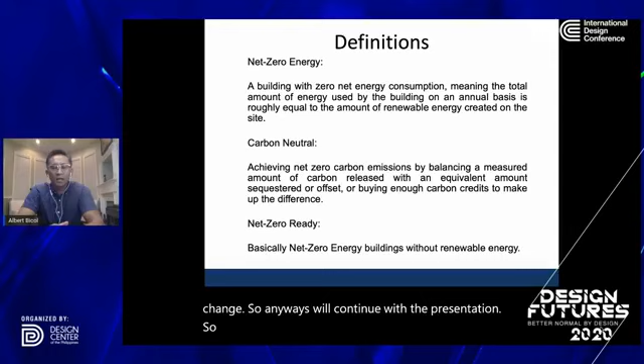So just basic definitions: net zero energy. All the energy that you consume in your building, you need to offset that energy with renewable energy. It's that simple. There's another definition of what we call carbon neutral. Carbon neutral buildings are similar to net zero buildings, but you only offset the carbon footprint of the energy that you're using.

For example, in Vancouver, we have hydropower electricity, and we only need to offset 5% of the electricity that we consume, because that's the carbon footprint of our power. And of course, this is different all over the world.

There's another definition that we use here in Canada and North America, which is what we call net zero ready. That means we do all the work to design a net zero building, and then the last part is to apply renewable energy in the future. That means it's ready to be net zero. So those are your basic definitions.

Now, this is fact. Global temperatures are rising, and what I can do, and the people out there in the building and built environment industry, and our colleagues, architects and engineers, we need to work together to reduce these global temperatures. And it's a proven fact that once we hit a 2-degree temperature rise of our planet, that is a very dangerous time.

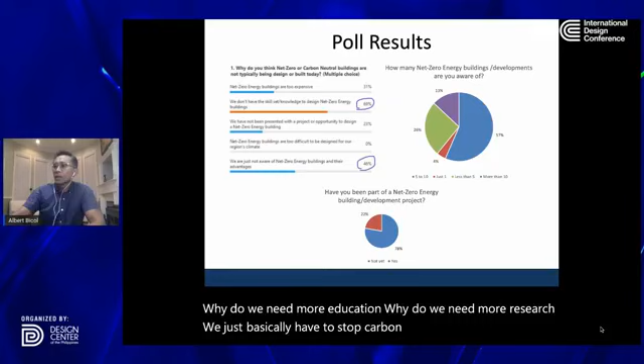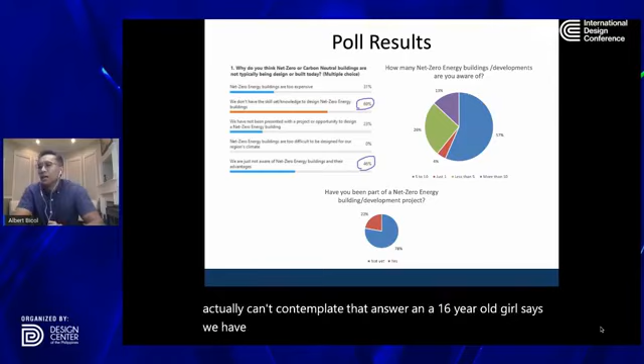I did a presentation for a Singapore group for smart cities, and I just want to share some of the results with you. Why do you think net zero and carbon neutral buildings are not typically designed or built today? One of the major poll answers is we don't have the skills and knowledge. Well, you know what? We do have the skills and knowledge. I actually can't contemplate that answer. And a 16-year-old girl says we have the knowledge already. And then the other poll result is we're just not aware of net zero buildings and their advantages.

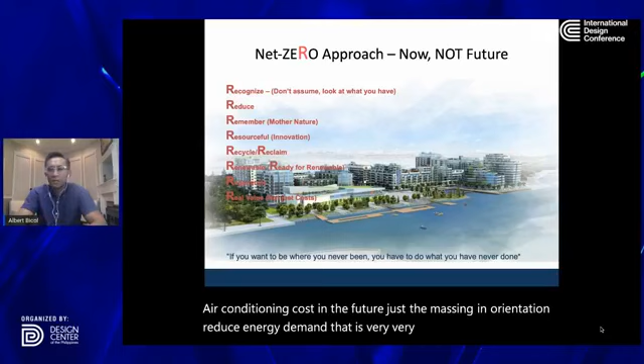Massing of the building can save you on energy and air conditioning cost in the future. Just the massing and orientation. Reduce energy demand. That is very, very important. You're looking at passive design. You're looking at all this stuff, and we'll go through this in greater detail. Remember the laws of physics and Mother Nature. Hot air rises, things like that. You know, natural ventilation, being resourceful.

What we mean by that is in Canada, and some of these concepts, I'm just generalizing. Of course, you have a floor slab that holds the floors up and the building. This floor is actually a thermal mass that keeps the building cool. So it serves two purposes. Anyways, we'll go through some of those concepts later. Recycle and reclaim. So any energy that you use, you have to think about it and you have to recycle it. There's ways of doing all that.

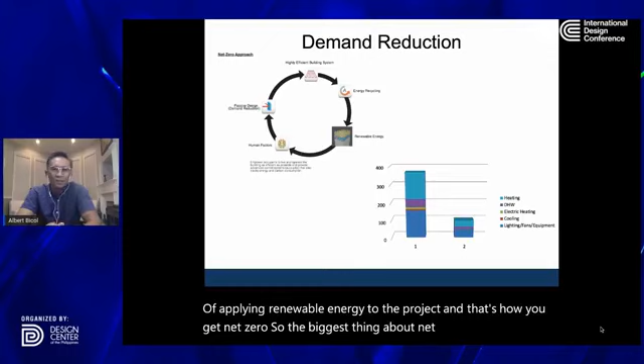And then the last part is you apply renewable energy, and then you decide what is the most feasible and low cost way of applying renewable energy to the project, and that's how you get net zero. So the biggest thing about net zero buildings is not the technology. It's not the solar panels or the wind turbines. The hardest part and the most innovative, and I guess the most cooperative thing that we need to work with in terms of the design team, engineers and architects, is how to reduce the energy demand of the building.

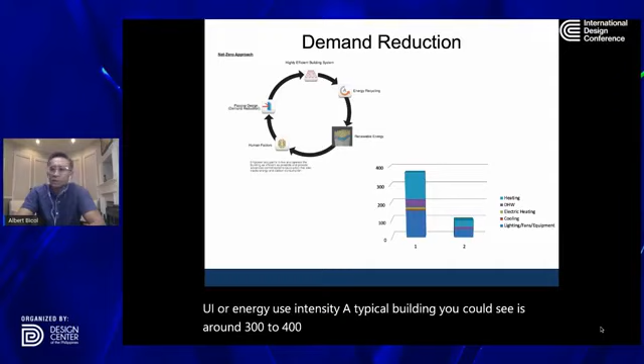And this is mainly measured by EUI, or energy use intensity. A typical building you could see is around 300 to 400 kilowatt hours per square meter per year. Most net zero buildings that I've designed are at 100 or below. And this is 80, 90% of the effort.

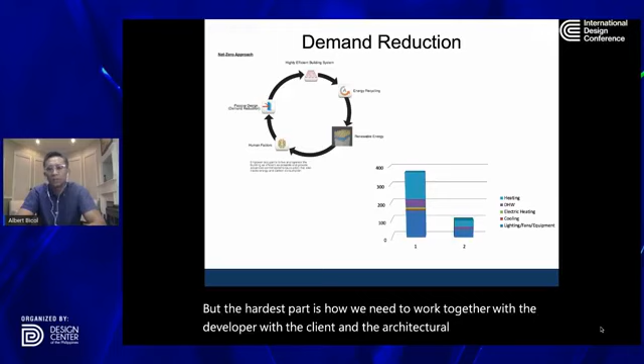You know, there's not much in designing renewable energy systems. It's solar panels on the roof or things like that. That's just a checkbox or a technology thing that you apply. But the hardest part is how we need to work together with the developer, with the client, and the architectural team, and all the rest of the design team, to get the demand low.

I am a big advocate of passive design. I'm a mechanical engineer. I'm an engineer. The last thing I think about is air conditioning and heating. That's the last thing. For example, for electrical engineers out there, the first thing I think about is how to maximize daylighting in this building. And then I look at LED and all these technologies.

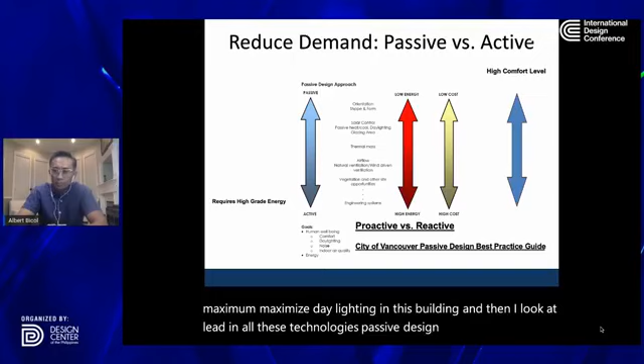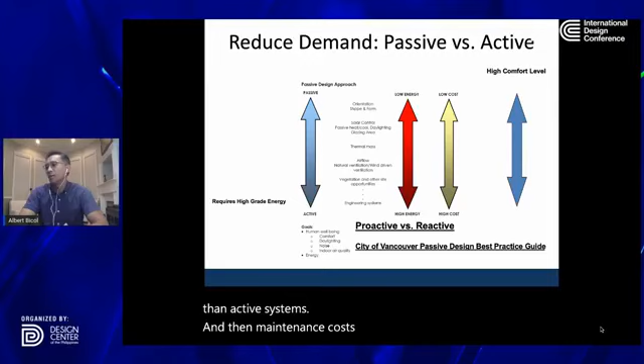Passive design in the scale, we've proven this. As the building becomes more passive, the building becomes lower energy consumption naturally. And the cost of the building reduces. Passive systems are lower in cost than active systems. And then maintenance costs, operational costs, everything goes down. And then if a building performs passively, it's more comfortable. Okay, that means you use less air conditioning. So it all sums up. It's all basic stuff.

So here are some of the common features of net zero or carbon neutral buildings. Integrated design, everybody understands that. We don't need to go into that too much. And here we go again, passive design first, not technology first. Natural ventilation I've seen on most of my projects. It's very applicable, even in the hot and humid climates of the Philippines. I'll take questions on natural ventilation, on how comfortable it could be in a hot and humid climate, if there are a lot of questions and debate later.

Thermal mass, radiant systems, that's common in other climates of the world. And then, of course, we look at local sinks. That means we look at things like underground aquifer wells that we can pump out through the ground, and we can use that for cooling. These are natural systems that occur. Can we use the seawater to cool our buildings? And then, of course, common for these buildings is on-site energy generation. That's solar panels and wind turbines.

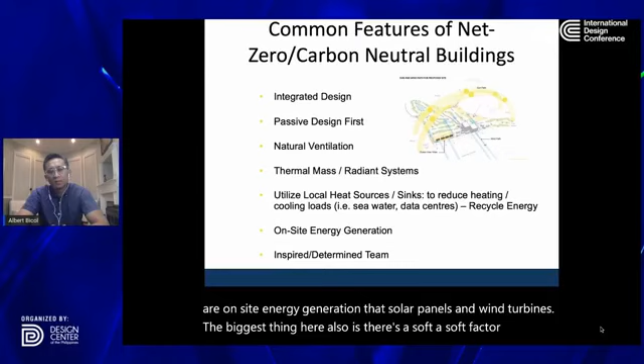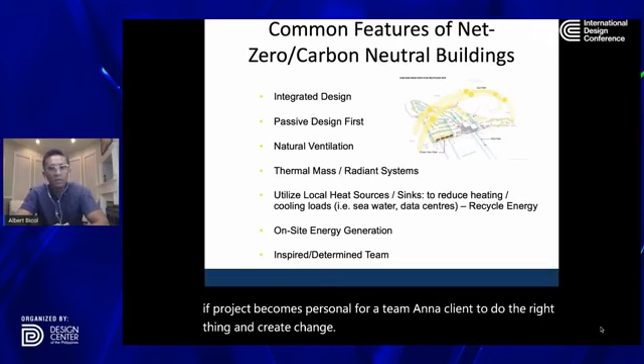The biggest thing here also is there's a soft factor. What I'm saying is that there has to be an inspired team. Somehow the project needs to hit a personal string. Someone in the client team is a champion and they want a net zero building or else. This is a personal thing. And the reason why I mention this is most decisions are based on a personal level. It's not a technical level. It's proven fact. Most people make decisions if it's personal. And if a project becomes personal for a team and a client to do the right thing and create change, you'll get a net zero building one way or the other.

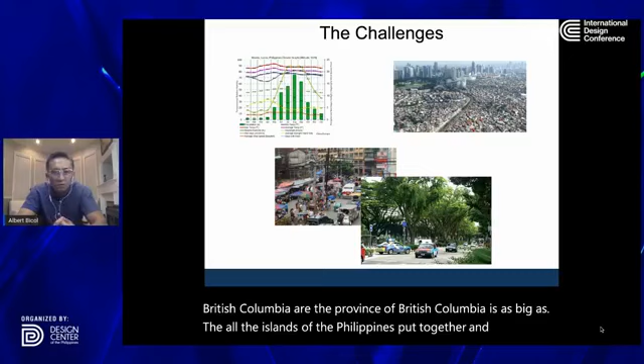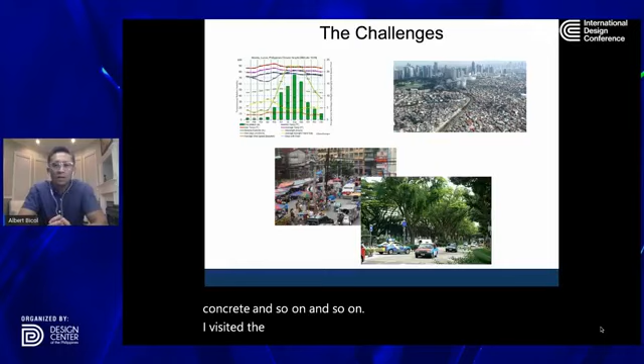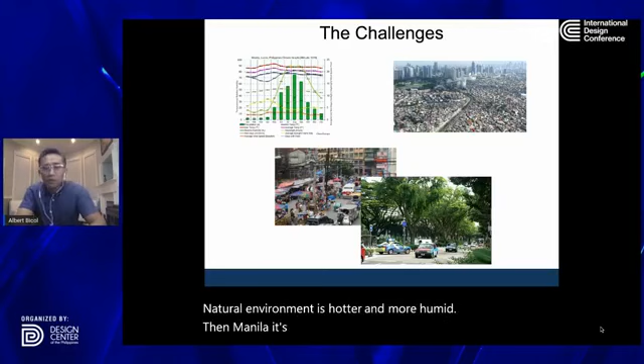I visited Makati a lot. I've been in Metro Manila, and I've also compared and visited Singapore. If you look at how we deal with this concrete, Singapore has a lot of shade. Singapore is actually closer to the equator, and for people who have been to Manila and Singapore, it seems cooler, even though their natural environment is hotter and more humid than Manila. It's just Manila artificially becomes hotter. So that's some of the challenges.

So this is coming back to the Singapore scenario, how to deal with the heat island effect. I don't know if this is true, but you come from the airport. I've always chatted about this with my wife, but there's a lot of trees on the highway, and it shades the highway. If you come from Changi Airport, these trees I heard came from the Philippines, and so it's kind of weird how Singapore uses these trees to reduce their heat island effect, and we should be using more in the Philippines climate.

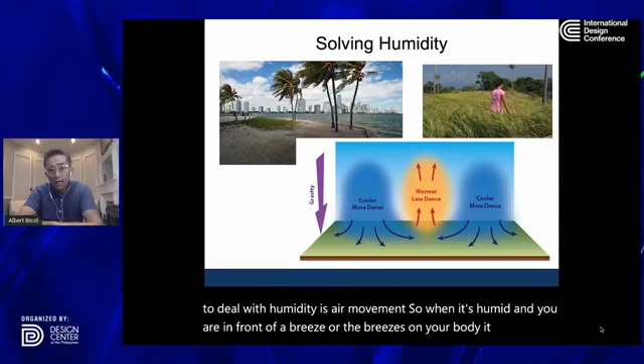Solving radiant, so that's solar gain, and that's the biggest thing for air conditioning that we have to look at, and I'll go through a few examples. Humidity is a big challenge. So the easiest way to deal with humidity is air movement. So when it's humid and the breeze is on your body, it cools you off. It dries the sweat off you. And that is how you solve the humidity issue.

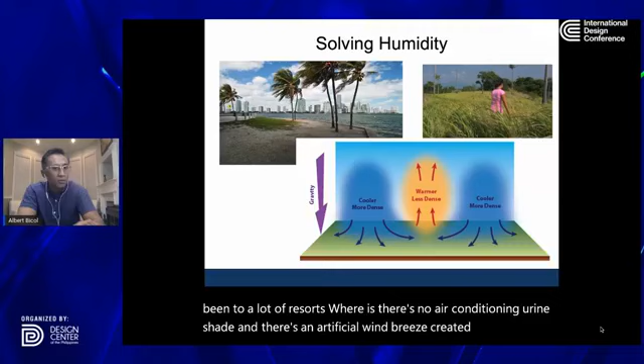So if you're under shade and it's windy, even though in the climate of the Philippines it's 40 degrees out and it's 80% relative humidity, you could feel comfortable. And I've been to a lot of resorts where there's no air conditioning, you're in shade, and there's an artificial wind breeze created by the architecture. That solves everything, and it's not air conditioned, and it's a high-end resort.

So there you have it. So you could just shade yourself and be in the breeze, and you could be cool. And that is one of the Bahay Kubo scenarios. As you could see, the Bahay Kubo is what we call environmental responsive design. Before air conditioning, before technology, this is how the Filipinos kept cool.

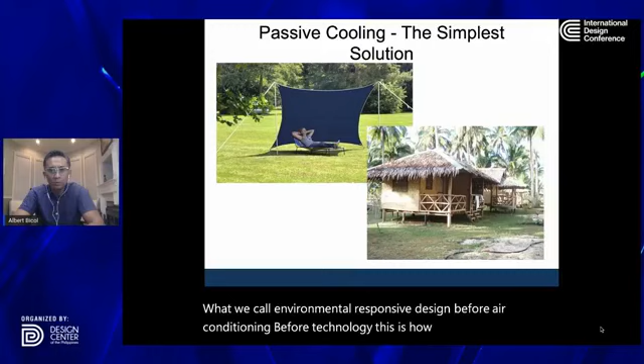So if we generalize it, in hot and humid climate or tropical climate, this is the architectural design, how to deal with the climate. So it's heavily shaded with the roof. And then if you open the window, it actually pops up, and then there's added shade, and then you get the natural ventilation. It's raised up so that the bottom of the Bahay Kubo gets cool air, and then hot air rises, escapes through the top of the roof, and you get good stack effect and natural ventilation.

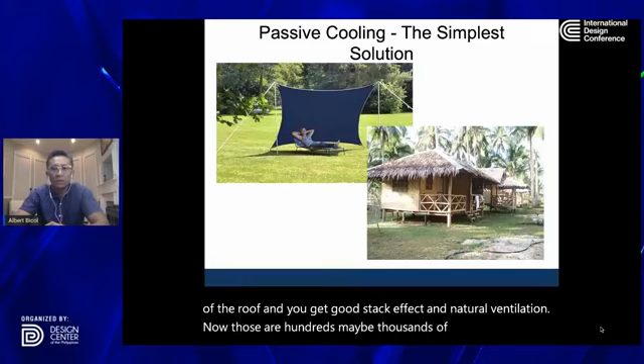Now, those are hundreds, maybe thousands of years old technology, and we need to modernize it and use these concepts in our buildings, and they can be used. Here's the perfect example. If you look at how you design churches. I'm sure the Philippine people would be familiar with this.

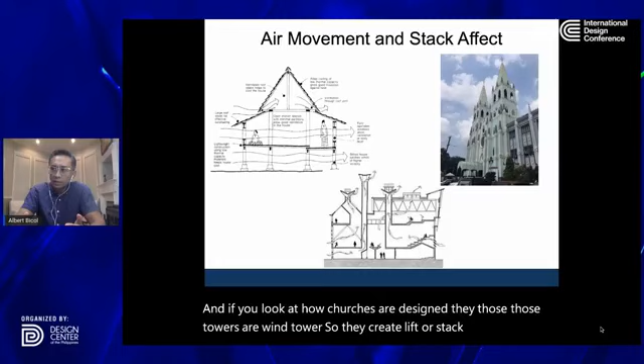This is San Sebastian Basilica, and if you look at how churches are designed, those towers are wind towers, so they create lift or stack effect, and what that does is all the air comes through the bottom, which is cool, and then all the hot air escapes through the top. And the more stack effect you have, the more air movement. That means it helps with humidity when you could feel an artificial designed breeze.

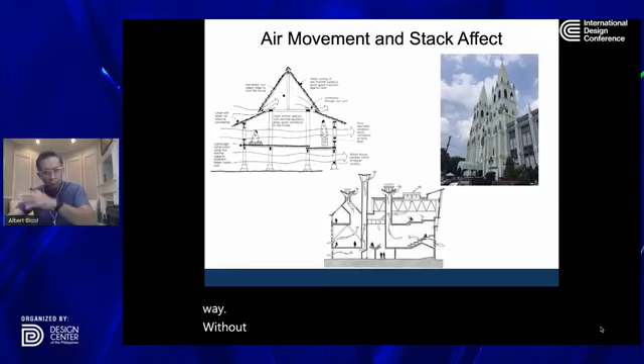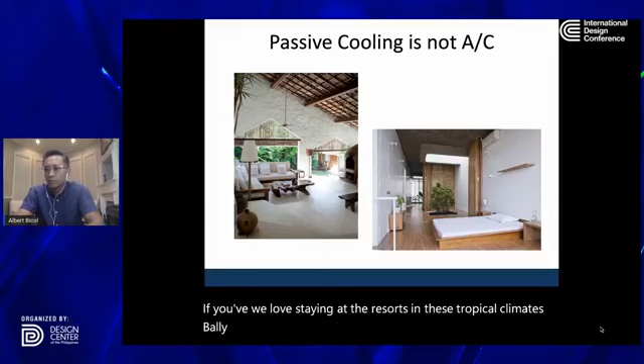So these are some of the concepts that we need to look at on the design in terms of net zero buildings. And by the way, the basis of this is reducing energy demand and reducing our air conditioning load, because that's the biggest challenge in this climate. So passive cooling first. We love staying at the resorts in these tropical climates, Bali, Malaysia, Indonesia, not just the Philippines. But as you could see, some of these resorts are designed with no air conditioning.

Some of the lobbies are basically wide open floor plates with the air breezes creating Venturi effects and stack effect, fully shaded, heavy mass floors so that the floor absorbs the heat. So all of these things are old technology that we can apply for these buildings.

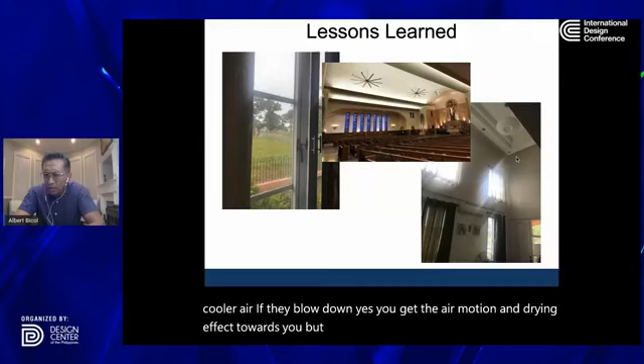Something as simple as creating an opening at the top and then blowing up so that it relieves the air, and then what replaces the air at the bottom is cooler air. If they blow down, yes, you get the air motion and drying effect towards you, but you're blowing the hot air down, right, and blowing it back. So anyways, these are the kind of simple things that we need to look at on these designs.

So now we talk about technology. So proven versus high tech. I believe in old technology, passive design, but then you have to balance. I'm involved in smart cities, smart buildings. There is a place for technology, and you need technology to maximize and optimize the building operation. And also, it's cool to have feedback, like talking to the controls.

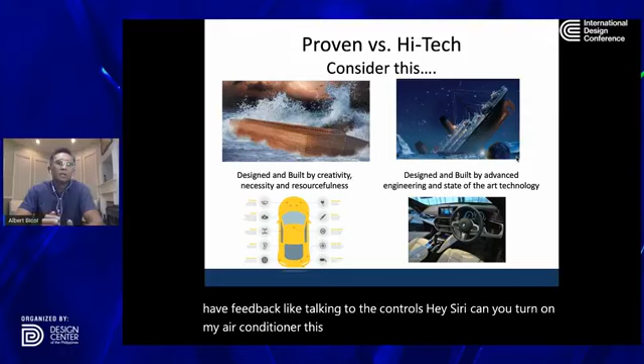Hey, Siri, can you turn on my air conditioner? This is more of a human interaction. I use the analogy of the car. The wheel will always be round. That's passive design.

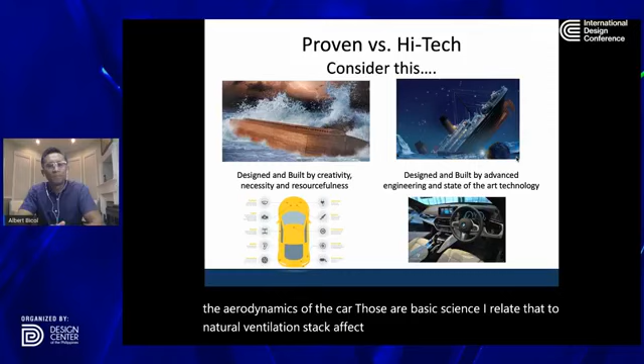But the inside of the car always changes, and the feedback, all the controls, this is the human interaction. That could be high tech. But the aerodynamics of the car, those are basic science. I relate that to natural ventilation, stack effect. So all of this stuff works in some way in this high tech versus low tech solutions.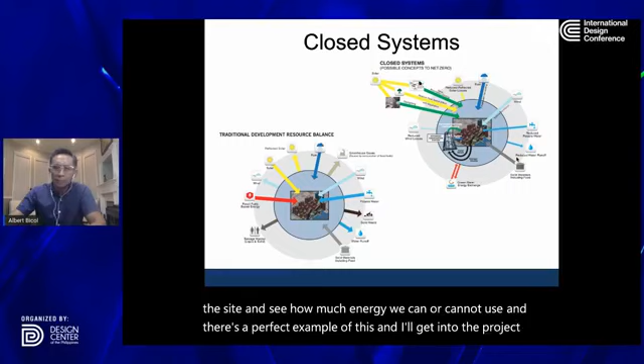I look at closed systems. That means I look at all the resources on the site and see how much energy we can or cannot use. And there's a perfect example of this, and I'll get into the project examples, is garbage. That's a waste. People just throw it away, but actually it's fuel for us to use for renewable energy. This is what we call integrated resource management. So we look at all the resources on the site, what can be used and reused and recycled.

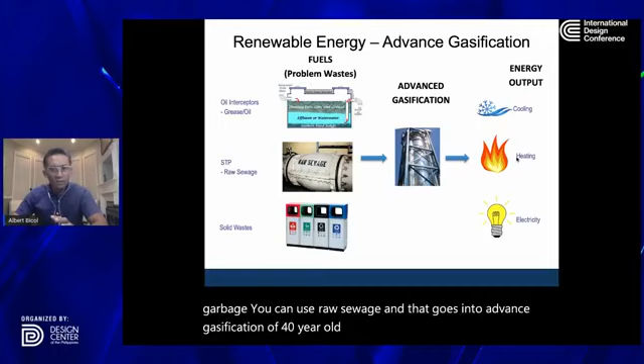And here is the advanced gasification system. So basically we use garbage, you can use raw sewage, and that goes into advanced gasification, a 40-year-old technology. It's not incineration. And out of waste, you can produce carbon neutral air conditioning, heating, and electricity, basically energy.

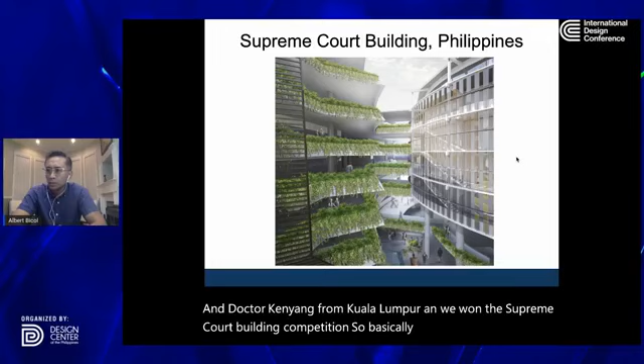I'll quickly go through a few examples, and I'll just take questions because I'm going to really quickly go through these projects. So I was a part of a team with my good friend Angelo Mañosa, and Dr. Ken Yeang from Kuala Lumpur, and we won the Supreme Court building competition. So basically, this project here, we looked at open corridors for breezes and to reduce the air conditioning load, so we don't have to air condition the corridors.

The glass that you see, this is what we call dynamic glass. So it tints automatically when the sun hits it. It's pre-programmed, and it's a dynamic tinting system. One of the systems we looked at was called View Glass.

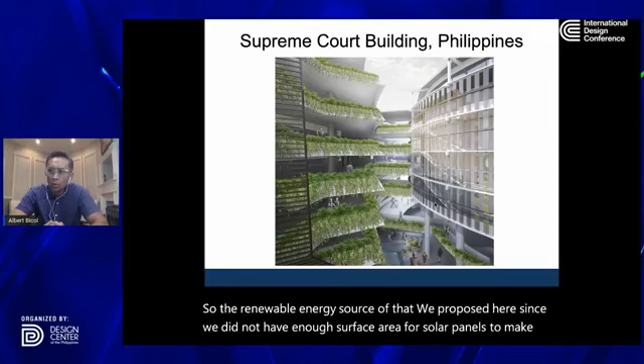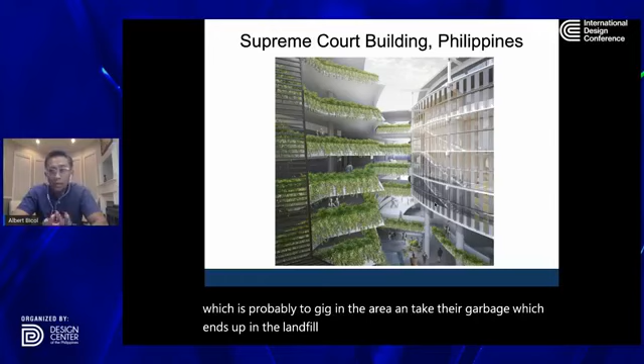So the renewable energy source that we proposed here, since we did not have enough surface area for solar panels to make this a net zero building, was, we were proposing to the Supreme Court judges when we designed for this design competition, to have contracts with the local government, which is probably Taguig in the area, and take their garbage, which ends up in the landfill, and basically truck it underground, and we'd advance gasify the garbage, and we produce carbon neutral air conditioning and carbon neutral electricity for this site, and we create a net zero building.

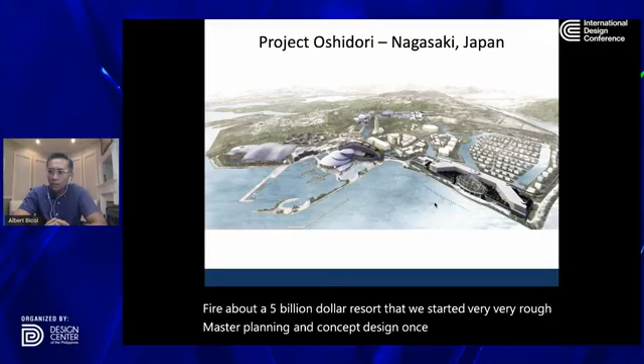This is a project in Japan that we just started, and of course the pandemic put it on hold. I'm not sure if it's going to start up again, but this is a whole, about a $5 billion resort that we started very, very rough master planning and concept design, once again with Angelo Mañosa. And basically there's a casino, there's villas, there's a mall, there's retail. It's everything. It's almost like a whole little town.

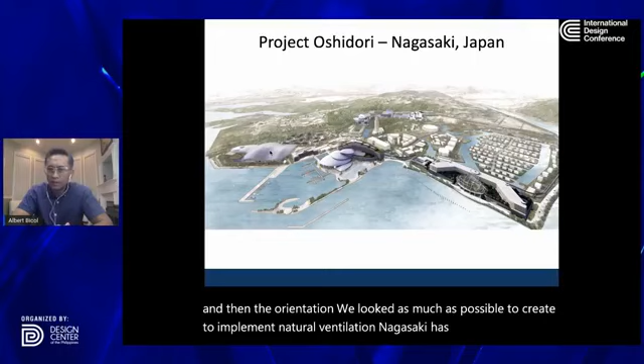So some of the features is we looked at passive design. We covered up the mall with a covering to reduce solar gain, and have an exterior space unconditioned or semi-conditioned. And then the orientation, we looked as much as possible to implement natural ventilation. Nagasaki has a similar climate to Vancouver. It's a moderate climate, so natural ventilation should work most of the year.

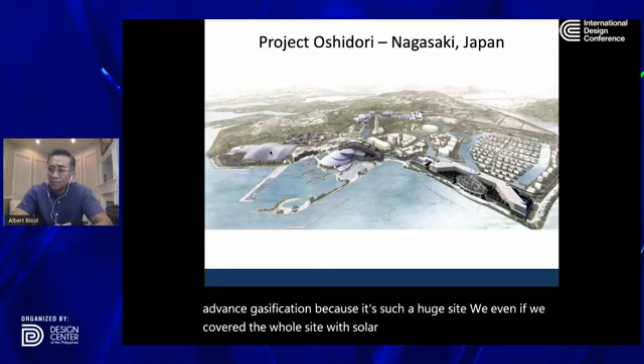And then we had a district energy system for heating and cooling that we looked at. We looked at maximizing solar panels on the site. We looked also at dynamic glass for solar shading. And then, similar to the previous project, we looked at advanced gasification because it's such a huge site. Even if we covered the whole site with solar panels, we would not get net zero. We probably needed 4 or 5 times the area of this site. But we looked at waste and how to use that waste to produce carbon neutral power and energy.

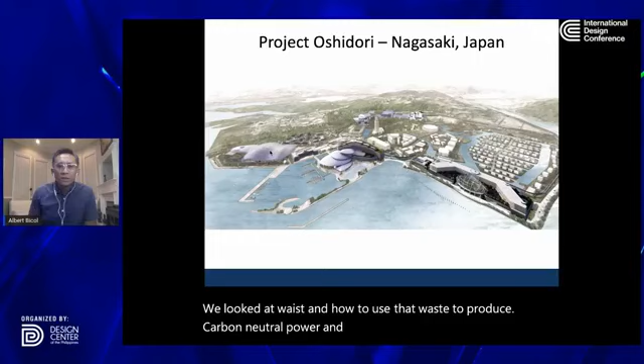Now, the EUI on this project, or energy use intensity, we projected, because of the passive design and the efficient mechanical systems and engineering systems and natural ventilation, was below 80 kilowatt hours per square meter per year. And these are very intense uses like casinos and convention centers and shopping malls. Hitting 80 is very, very difficult to do. But once again, it's conceptual work, and it was an estimate at the time.

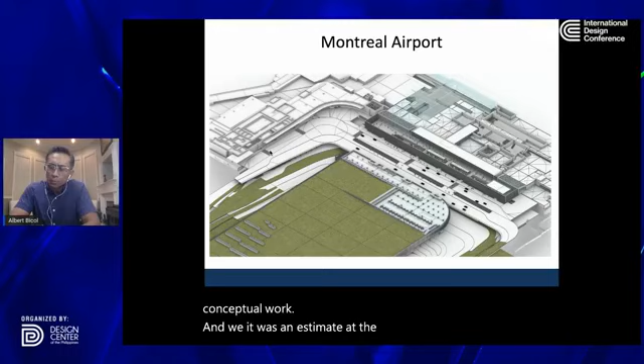Another large project I'm working on currently, and once again got put on hold, is the Montreal Airport. This is a huge project. It's an expansion of the airport, and a major part of this project is the parking garage. We plan on putting a solar farm on there. And then also there is a lot of garbage on the site, once again, with combination of advanced gasification.

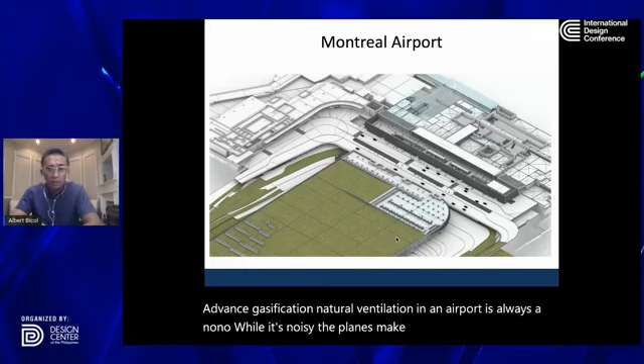Natural ventilation in an airport is always a no-no. Well, it's noisy, the planes make a lot of noise, but we looked at how we can implement natural ventilation for an airport. So you have to think out of the box. You can't just do what has been done before and then create something different if you keep doing the same thing. And of course, airports love a lot of glass, and we looked at double facades on the project, and also comparing that with dynamic glass.

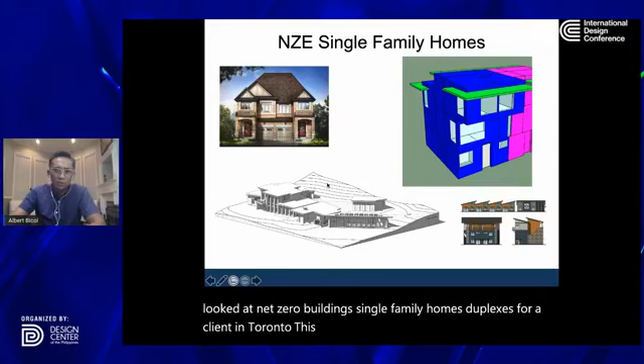And the scale comes all the way down to single family homes. We looked at net zero buildings, single family homes, duplexes for a client in Toronto. This project here is in Washington State in the United States. It's a passive house. And if you're familiar with passive house, it's very high in envelope performance, glazing performance. And once you have a passive house, it's very easy, because the EUI is so low already that you can create a net zero building easily. This is one of the easiest projects you can generate in terms of net zero energy buildings.

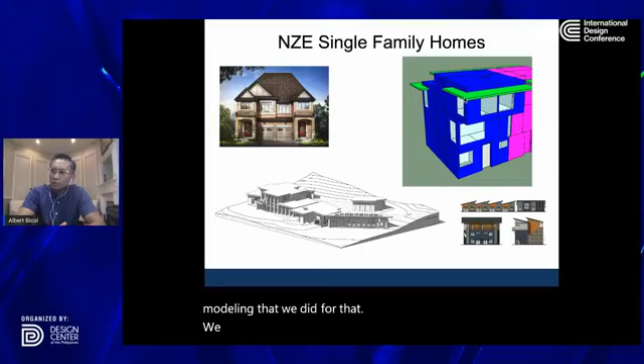And then this is a project here in Vancouver, and this is a project in the Philippines, and this is the modeling that we did for that. We got the EUI down to about 49 for a residential house, and that includes air conditioning. And some of the concepts we looked at there is to insulate the house. We proved that insulation is required. It's not a typical construction in the Philippines. We looked at double pane glass. We looked at things that haven't been done.

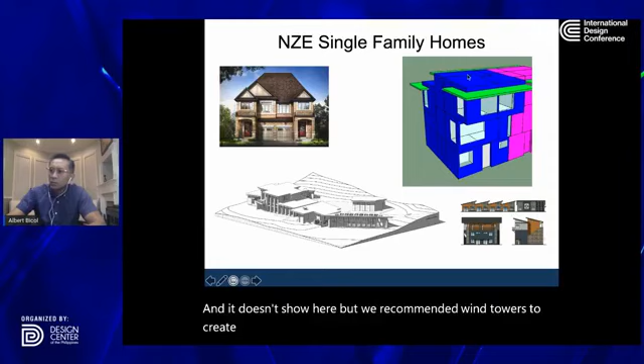Well, if you want a net zero building and it hasn't been done somewhere, then you got to do something different. So we looked at that, and it doesn't show here, but we recommended wind towers to create stack effects. So when you open your window, you create Venturi effect and stack effect, and so we can generate higher levels of airflow for natural ventilation.

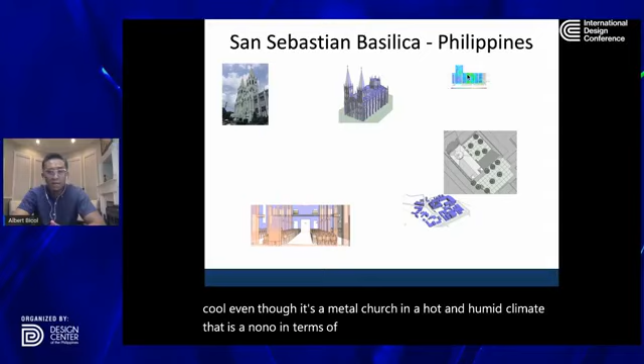This is the San Sebastian Basilica. So we looked at naturally cooling this building and how to keep it cool, even though it's a metal church in a hot and humid climate. That is a no-no in terms of construction. Metal will get hot and stay hot in that climate. So yeah, for a hot and humid climate, softer materials are probably better. But of course, I get challenged all the time because concrete is a major material that's used a lot in the Philippines, because labor is cheap and the materials, and it's more expensive to have, I guess, lower weight construction.

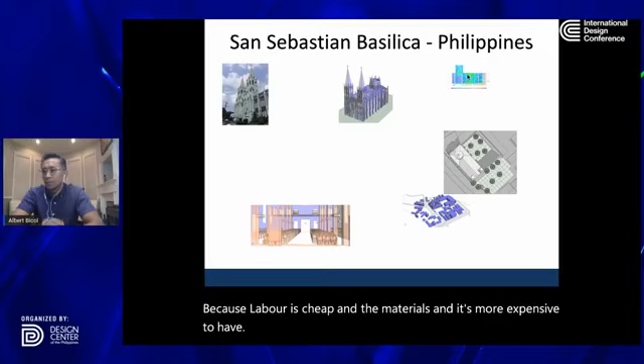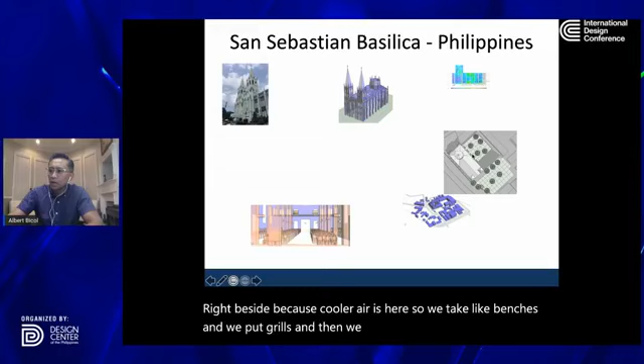So for this project, I'll just go through one concept that we looked at. We wanted to supply from the garden right beside, because cooler air is here. So we take like benches and we put grills, and then that air goes down below the church. There's existing tunnels under the church. We supply air at the low part of the church, and that's cooler air, and it's cooled by the lower heat island effect of the garden next door. And then we displace the air through grills, and we let the hot air rise. And we opened up these chimneys, including the one over the priest.

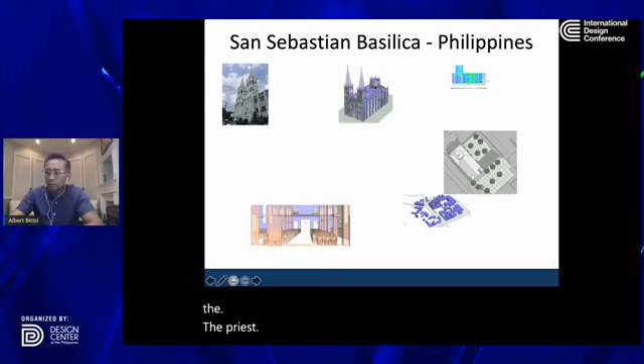I forgot, what a bad Catholic. I forgot what it's called. The altar. Jeez, I was an altar boy, and I'm gonna get in trouble. Anyways, sorry, until I was 16, I was an altar boy.

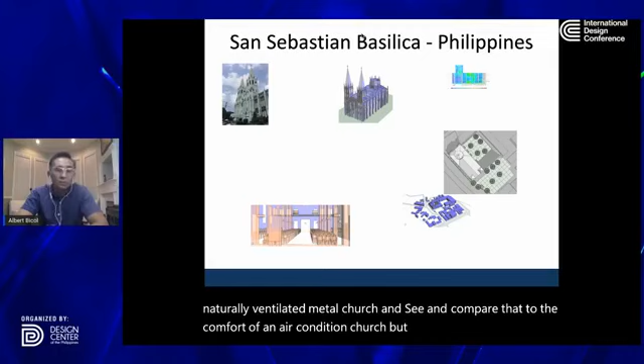Yeah, we open that up and we create more breezes. Now, you can't compare this to air conditioning this church. There's no way that you can compare a naturally ventilated metal church to the comfort of an air conditioned church. But you would save millions of pesos per month for not air conditioning this church. And from this design to what it was before is a huge improvement.

So anyways, this is Mandani Bay in Cebu.

So what we did there... I'm just reading the comments. I just had a laugh. Anyways, we'll share that with everyone if we have time.

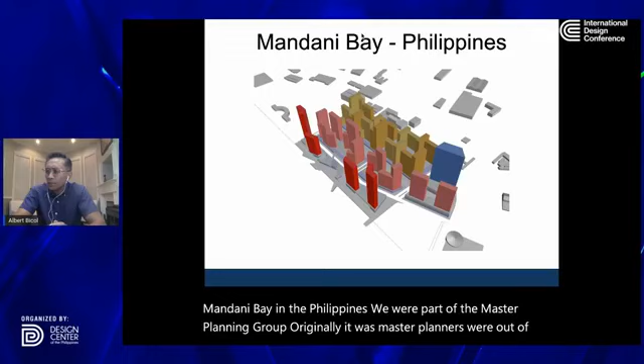So Mandani Bay in the Philippines, we were part of the master planning group. Originally, the master planners were out of Australia. Mandani Bay was a partnership with Hong Kong Land out of Hong Kong, and a Philippine group, Taft Properties. So we provided a sustainable master plan and how to get the whole site to be net zero. So these are multiple high-rise buildings.

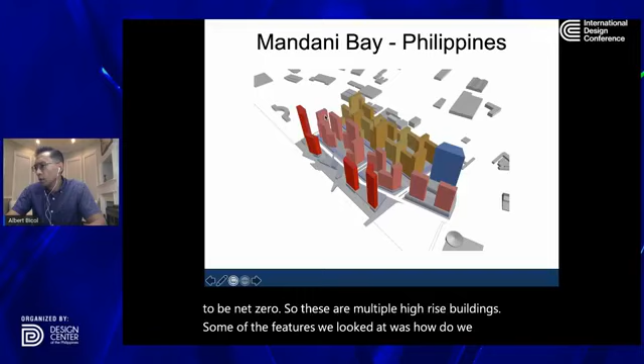Some of the features we looked at was the local climate and how to design this for wind breezes, and the wind breezes go this way. So we aligned the buildings so that the wind breezes pass through the buildings freely, and it creates more of a walkable community. And then that could be utilized for natural ventilation for the buildings. You could see the orientations of the buildings.

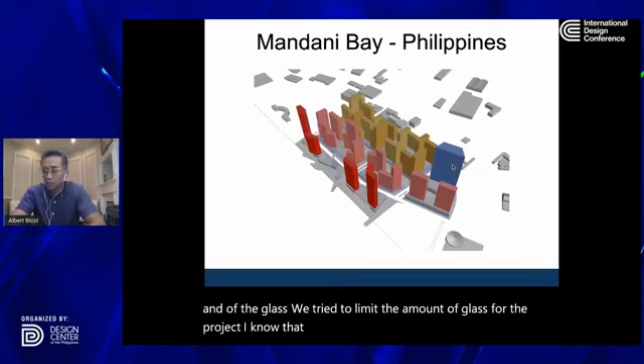We tried to make sure that we have less east and west orientations of the glass. We tried to limit the amount of glass for the project. I know that that's a challenge because you want to sell for the views and daylight. I get that. But then we tried to balance that out.

We looked at, once again, because this is such a huge site, we proposed using the solid effluent from each STP or sewage, and using that solid waste and turning that into fuel for advanced gasification.

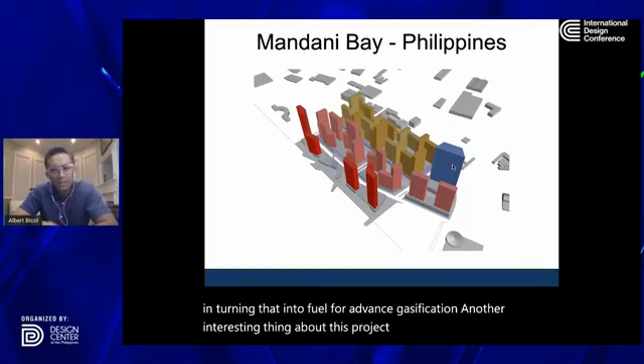Another interesting thing about this project was the site was smelly, and they asked us, what can we do? So what we found out was the effluent or the garbage in the water, the creek beside it, was making it smelly. And what we did was we proposed a system where we filter all the sludge, and guess what? That sludge is carbon fuel for advanced gasification. So once again, it's this closed system approach on how to make these buildings net zero.

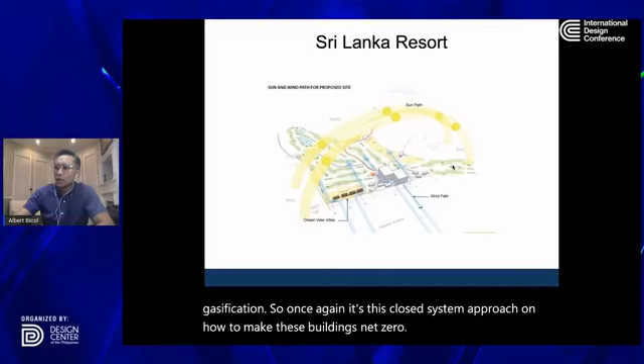This is a resort in Sri Lanka. We looked at the water temperature and see if we can use the water and the sea breezes to cool the building. We look at orientation, massing of these buildings on a master plan level, the sun angles, so that we can eliminate or reduce air conditioning in this hot and humid climate of Sri Lanka.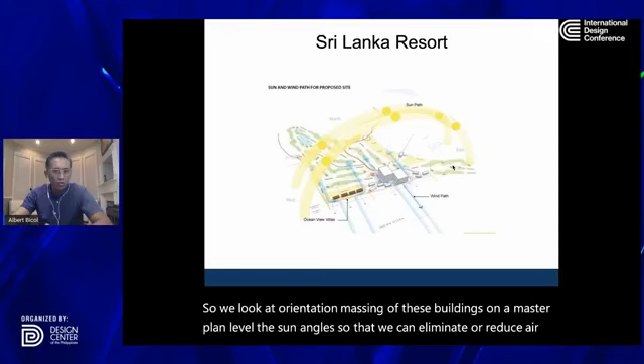This is another church that we did. This one's in Toronto. Of course, there's heating. These are those concepts. This is not just a bell tower or a display for the cross. This is a wind tower, and it creates lift. And once again, this is the air handler. Can you imagine? This is the air handler.

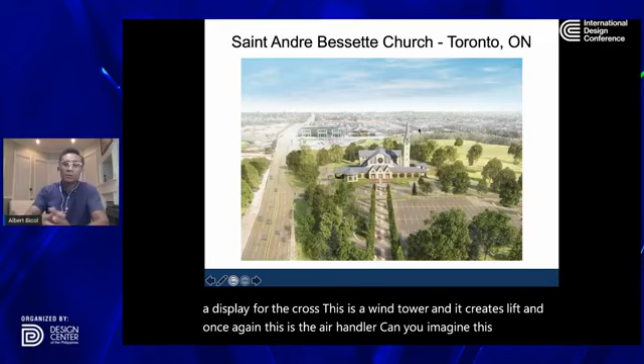And I've done a lot of research. Michelangelo designing St. Peter's Basilica. There's common themes here. I speculate that there's no heating or cooling in that church, and it's been around for hundreds of years. So, looking at these old technologies and how to implement them for newer construction and making them more sexy and more modern, that's the challenge, because these are proven technology.

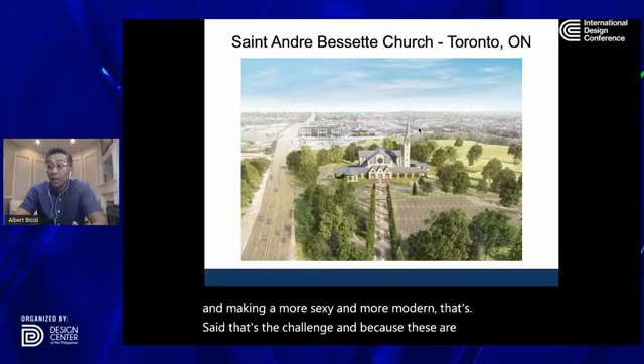Other than things like dynamic glass and advanced glazing, solar panels, I haven't talked about air conditioning systems, right? The main goal here is to reduce these air conditioning systems so they're simpler. Like it could be just a fan inside the building, keeping air moving.

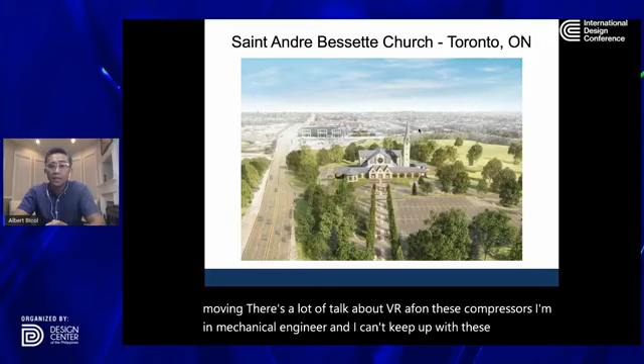There's a lot of talk about VRF and these compressors. I'm a mechanical engineer and I can't keep up with these things, right? And that's why I don't talk about them too much in my presentations, because if relying on technology, it becomes obsolete within a few years. It's like your iPhone 12 is coming out, my iPhone 8, whoever has an iPhone 8, guess what? It's going to be obsolete.

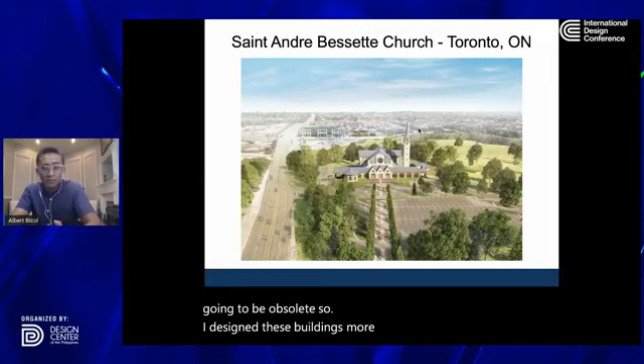So I design these buildings more simple, more passive, and more on the proven technology, because you can reduce energy demand of these buildings, daylighting, right? Use windows for natural ventilation, and so on and so on. And this relates once again back to the Bahay Kubo, right? And churches.

This is the Olympic Village that I did. This is a net zero building for the 2010 Olympics. It has solar panels on the roof. Typically, a residential building would have a double loaded corridor. The corridor is in the middle, and then you have suites on each side.

I put the suites on the outside, but this is done in Asia a lot, and we don't have to air condition the corridor. And then also that corridor that hangs on the south side, exterior corridor, becomes the shading feature for the south windows. So it's simple stuff, right? It's common sense sometimes.

This is a large community in Toronto, 120, 150 acres, and it's a huge net zero community. They have huge aspirations. It's going to be a smart city. This is the sewage treatment plant for the nearby area, and we're trying to use that as fuel. That was proposed. So this is in basic master planning right now, concept design.

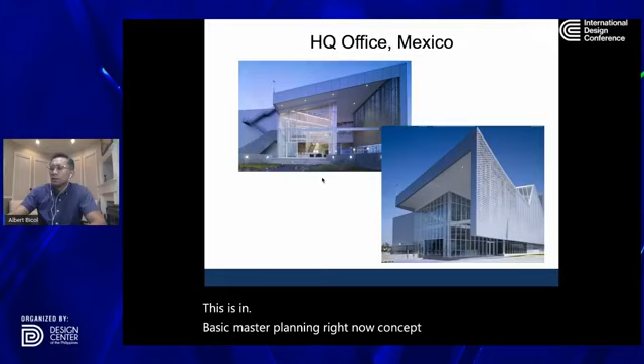This is a project in Mexico. It's a head office for a parts company, car parts. As you could see here, they didn't want to reduce their glass percentage for a hot and humid climate. So we, with the architect, designed this feature. The light can go through here, but the solar gain is reduced a lot. So it's all about the diameter of the holes and the spacing of the holes. So the light goes through, but the heat doesn't get through.

This is a project on a volcano. They wanted a resort on a volcano. But anyways, it's going to be a net zero project too.

Project in LA. I think it's about time to take questions. 5 minutes? Yeah, 1 minute.

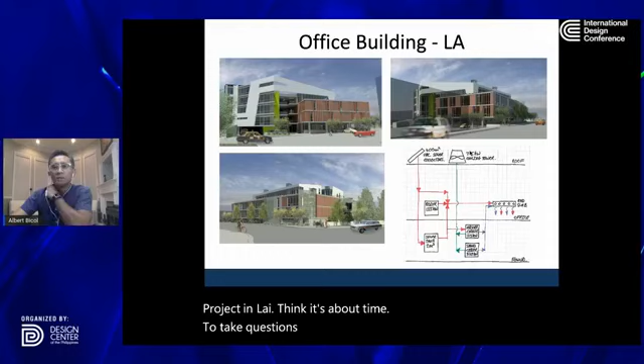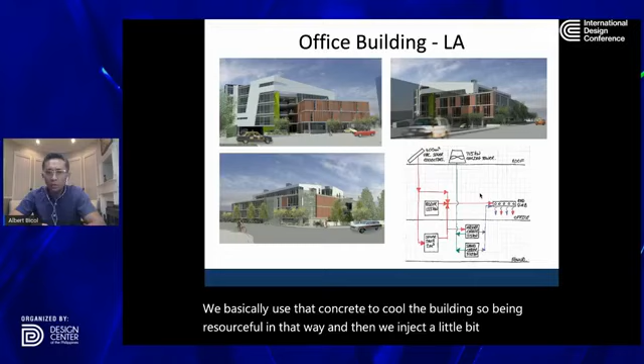So this is a project in LA. We're using absorption chillers. So solar panels power a chiller, and we use radiant cooling. That means we put this cool water into the slab, and that's how we get natural cooling. We basically use that concrete to cool the building. So being resourceful in that way, and then we inject a little bit of cold water that's produced by solar through an absorption chiller. So this is an office building in LA, to be a net zero building, and that's the heating and cooling system for that building.

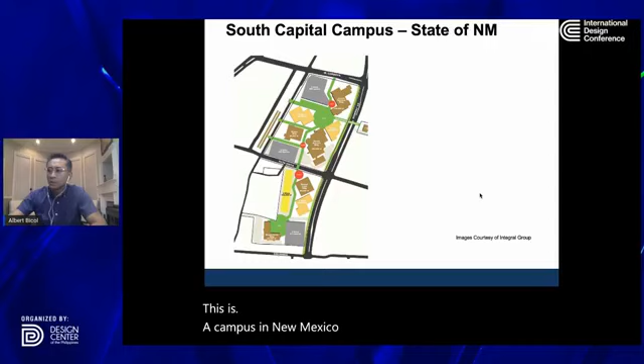This is a campus in New Mexico. It's a government campus, and this is the master plan. And basically what we did there was, how do we share energy? So some buildings are on cooling, some buildings are on heating. Some sides of the building are on heating, some sides of the building are on cooling. So how do we regenerate the energy and recycle this energy before producing the energy and using carbon fuel? So this project here really is a testament of how we can recycle energy.

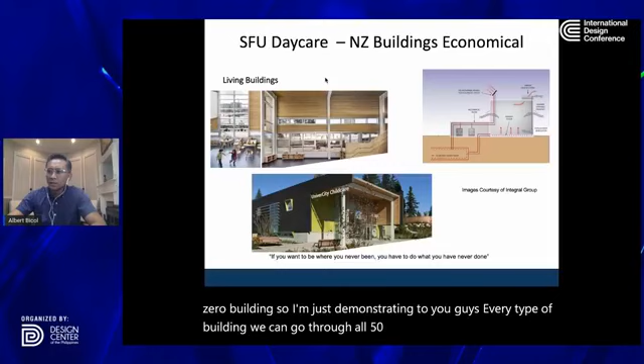This is a daycare, 5,000 square feet. It's a living building. It's a net zero building. So I'm just demonstrating to you guys every type of building. We can't go through all 57 projects, but these are some of the more interesting ones. Some of the other ones are quite boring, I tell you.

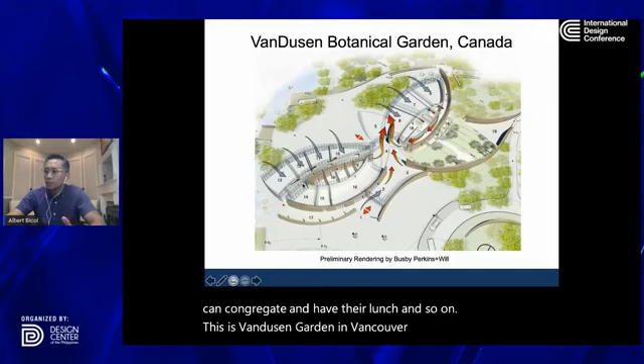This is VanDusen Garden in Vancouver. All the air comes through the perimeter, goes across through the corridor and then up to the wind tower. If you Google this building, the wind tower is beautiful, the way the architect designed it. As you could see here, there's a style that's coming up. Natural ventilation, wind towers. These are old technology, and architects will have lots of fun designing these things.

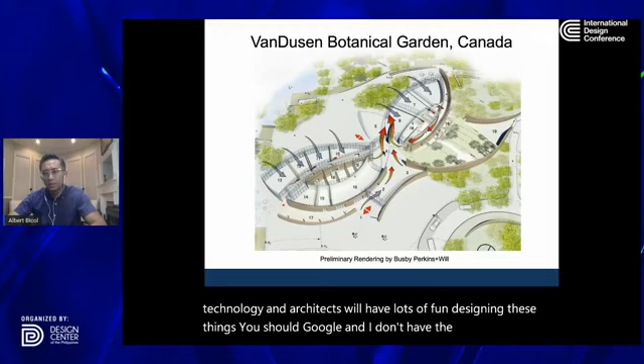You should Google, and I don't have the slide here or a picture, Incheon Airport. Incheon Airport has this wind tower right on top of it. It's beautiful the way it was designed. I'm not sure who the architect was. It could be Foster's or somebody.

Okay, so how can it be a norm? I think us professionals, architects and engineers, we need to act like doctors. When there's a crisis, doctors work together, and they have a common front. I think now we need to create this front as architects and engineers, and we need to tell our patients, and with all due respect, developers are our patients, and we need to provide the proper advice to our patients.